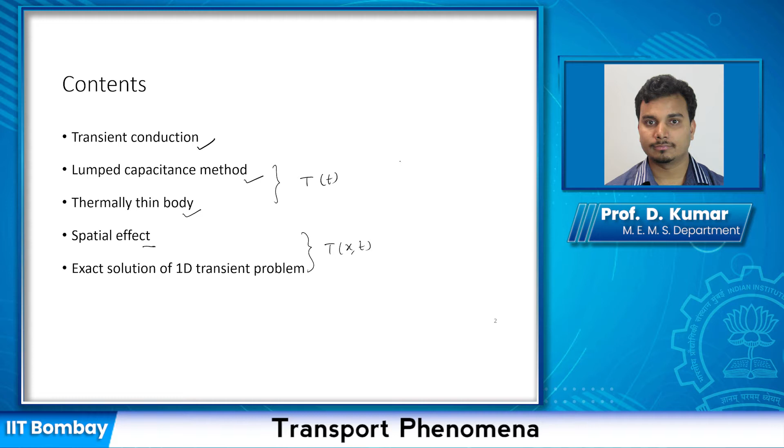So there could be two situations. In one case, we'll see where you don't have any temperature gradient within the wall. It may be initially at some temperature Ti, and then you submerge it into some fluid that is at some temperature T infinity, and then we analyze how the temperature of this entire body will change. So we don't have any temperature gradient within the body.

In this case, we'll see that initially again you have a body which is at temperature Ti everywhere, but then we'll look about how will the temperature change with respect to time when you submerge this into a fluid which is at T infinity temperature. So we are going to discuss about these two cases, and our focus will be on analytical solutions. We are not going to look at numerical solutions.

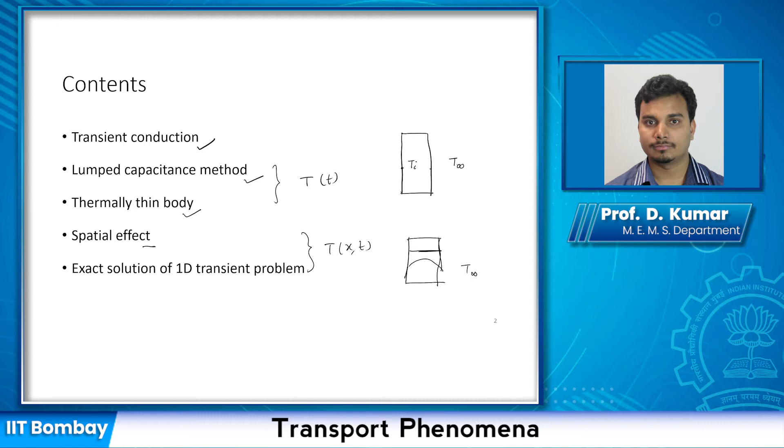So an example of what we are just talking about, the change in the temperature of the body: let us say you have a hot forging, which is initially at high temperature. It could be a steel forging, that you use for crankshaft of your automobile, or maybe large forgings. The shape does not matter a lot, because what we say is when we submerge this high temperature hot solid in a liquid, or it could be in a gas, then...

So for all time less than or equal to 0, you have T equals Ti, and just at T equals 0, you submerge it. Then the temperature of the body will change with respect to time. Intuitively you can think that initially it is at some temperature, and then it will probably change.

In this case, what we are saying is this is temperature versus time. So initially it can be at 1,000 Kelvin, and then if you keep it for a very long time, it will keep decreasing, and it will come to some T infinity. In between you will have some temperature, and you want to know what is the functional form of this temperature variation with respect to time.

We would like to know how long would it take to reach T infinity, or other things, like it can start with 1,000 Kelvin, and how long does it take to reach 800 Kelvin, 600 Kelvin, 400 Kelvin, and so on.

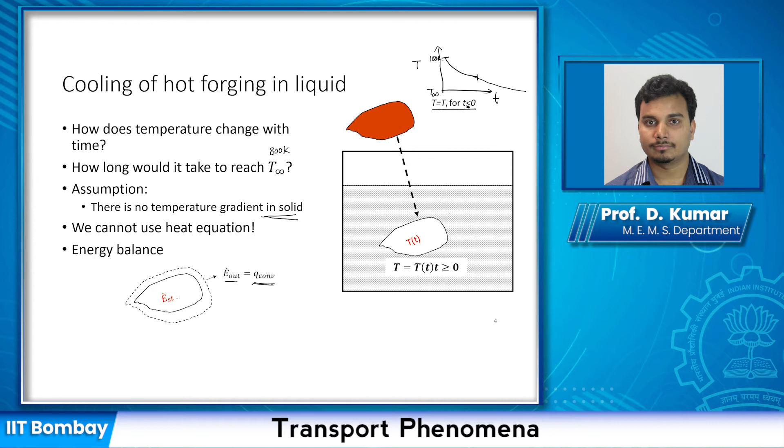So the heat transfer between this solid and this liquid is due to convection. If we do this, then the change in stored energy essentially has to be Q convection. So E in, there is no input heat in the body. It's all going out.

E in minus E out is equal to stored energy, and E out is essentially H times As times (T minus T infinity). As is the surface area of this body, T is a function of time, and T infinity is the temperature of the liquid, which we assume constant with time. It may be a large volume of liquid, so its temperature does not change appreciably.

And that should be equal to the change in stored energy with respect to time. So rho V C, where C is the heat capacity, V is your volume, rho is the density of the solid, giving rho V C dT by dt. We can write dT by dt because temperature is only a function of time, not space, so we can write it as an ordinary differential equation rather than a partial differential equation.

So once you do that, what you have done is set it up as a first order linear differential equation, which is pretty easy to solve.

To simplify it further, we substitute and define a variable called theta, which gives you the temperature at any time minus T infinity. So you can write theta i as Ti minus T infinity, where Ti is the initial temperature of the solid.

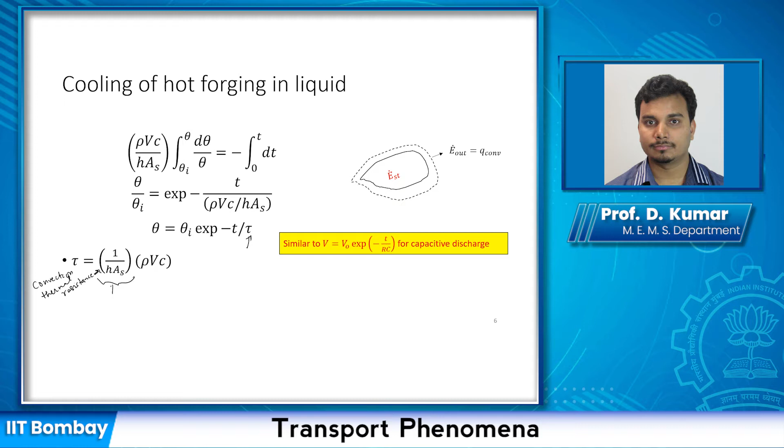So this is the convection thermal resistance, and then rho V C is essentially the capacity of that solid to keep the heat. So you can see that tau is again RC, similar to the capacitive discharge case, where RC is your time constant. This is your thermal capacitance, and this is your convection resistance.

So what we have come up with is a very simple way to analyze the transient heat conduction problem, provided we can make the assumption that the temperature does not depend on space, x. Temperature only depends on time; within the body, the temperature is uniform.

If you look at this and want to plot it, it has to be an exponential decay. At time equals 0, this thing is 1, so initially you have some theta i. As you go, at t equals infinity, this term will become 0.

So what does theta equals 0 mean? Theta is defined as the temperature of the body at any time t minus T infinity. So if this is 0, that would mean T at that time is equal to T infinity. It will take a very long time to reach exactly T infinity.

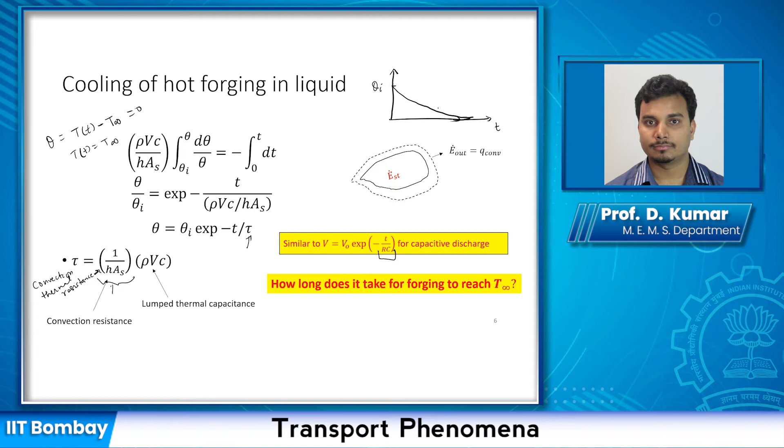But as you know, this is exponential decay, so the decay is actually quite fast initially. You can also see that it has dependence on RC, so as your time constant increases, your cooling rate will become slower and slower.

So just from this you can know. If you increase, for example, heat transfer coefficient, then you are increasing this thing, so your time constant decreases, so your cooling is faster. This is as expected, right?

Similarly, if your body's density, heat capacity, etc. are higher, then it can retain heat for longer. So your capacity is increased. So this thing will move here, so it will be difficult to cool.

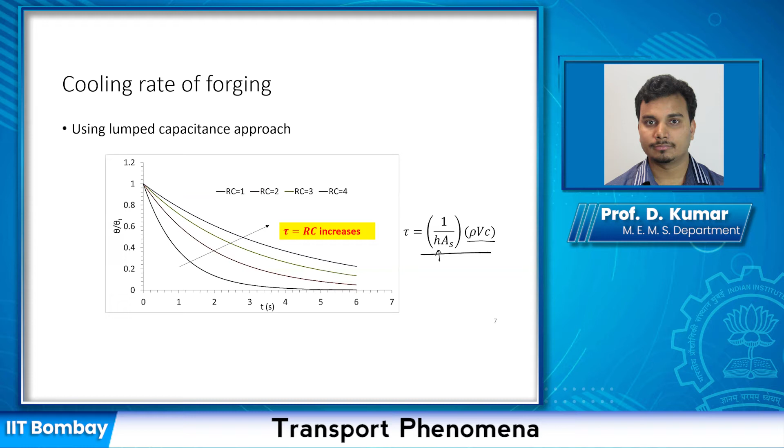Okay, so the other thing we want to know under these conditions is how much heat has transferred, because typically in such a cooling system you have a tank that you are forging and then quenching it. You will have some inlet here and some outlet here, so that you maintain water temperature at T infinity, right? If you keep cooling a lot of hot objects in this, the temperature will rise. So you want to know what should be your circulation rate. You want to know typically Q, that will give you an idea of what should be your circulation rate, that you can get just from Q.

Okay. That Q is equal to at any time hAs your theta. But you may also want to know how much cooling has happened, so how much heat is being extracted. That also you should know.

So to know that, what you can do is essentially heat transfer rate times dt integration will give you the total energy that is being transferred. So this is equal to HAS theta dt, and theta we know from there, this is HAS, you can leave here. This will be theta I, from here we know. Theta I exponential minus t by tau, where tau is again constant for a given system.

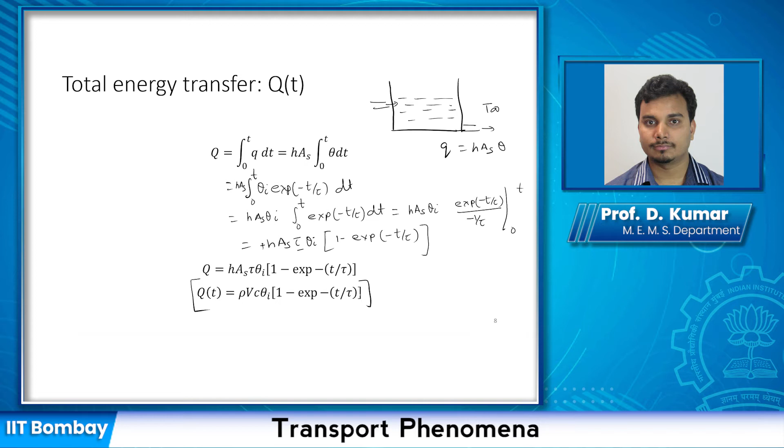Okay, so this gives you the change in total energy that is being transferred with respect to time. This is what we call the lumped capacitance method. And in summary, we have these things: theta equals theta I exponential minus t by tau, then you have the energy that is being transferred, which you can calculate from there.

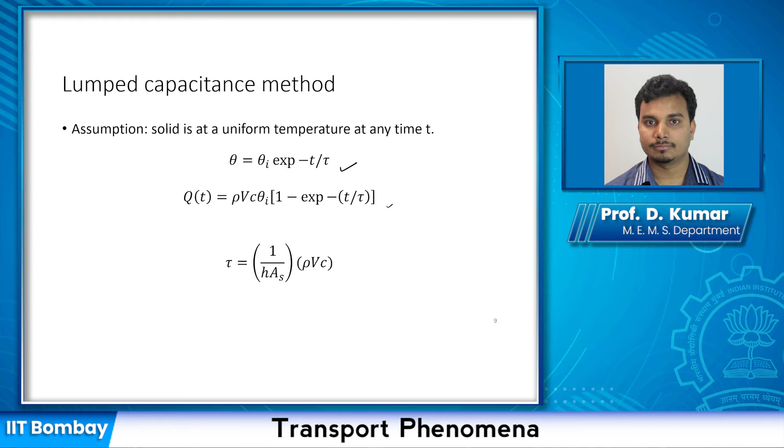Now we need to see that we have done the analysis, but we don't know when it will be valid. So we need to see when it will be valid. To do that, let us start with looking at the validity of the lumped capacitance method. We'll start with steady state conduction, and discuss later how it's related to transient.

Through a plane wall where you have fixed temperature Ts1 and Ts2, and here you have some convection. So you have conduction heat rate here, and you have convection. So at the wall, if you do what you call surface energy balance, then you will have Ka by L, Ts1 minus Ts2 — negative sign is incorporated here — equal to Ha, Ts2 minus T infinity.

So this is conduction, this is convection, and if you rearrange it, you can write Ts1 minus Ts2 divided by Ts2 minus T infinity is equal to this by this. So you can write 1 by Ha in the denominator, and then L by Ka will just go in the numerator. So what you see is this is your conduction resistance, and this is your convection resistance.

So the temperature gradient — the physical significance of this term is that the numerator actually shows what is your temperature gradient within the body, in comparison to what is your temperature difference at the surface to the ambient atmosphere.

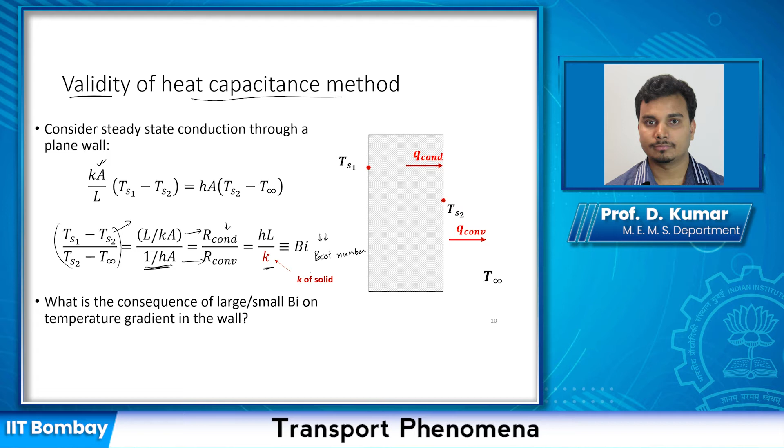So this is what we are saying, that if your Biot number is smaller, as you can see here in the temperature profile with respect to Biot number, if Biot number is much less than 1, then the temperature gradient within the body is much smaller. This is your plane wall, and on both sides you have some T infinity. So convection is happening on both sides. Initially you are everywhere at temperature Ti, but with respect to time, when you quench it, or bring it to this atmosphere, it will start cooling off.

This is the direction in which time increases. As you increase the time, it will cool off. So the temperature will reduce from Ti to this temperature, to this, and this. But if your Biot number is much less than 1, then it will decrease in a fashion where your internal temperature gradient is very small. If Biot is equal to 1 and Biot is greater than 1, then you will see that the internal gradient is much larger. In this case, the gradient may be almost similar, internal and external, but here your internal gradient is much larger because your Biot number is greater than 1.

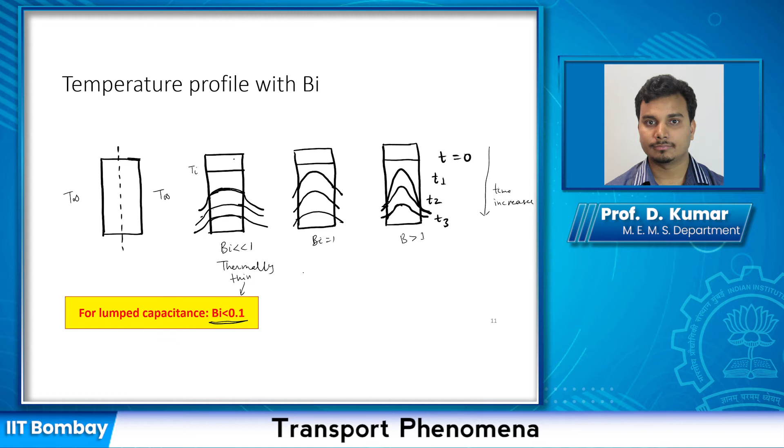So if this is the case, then we call this thermally thin, because there is no temperature gradient within the body. So we can call it thermally thin. And for this part, your lumped capacitance method is valid, and we take this number as Biot less than 0.1.

So to define the Biot number, we saw that Biot is HL by K. There could be cases where your L, your geometry may not be regular - it could be a cylinder, a sphere, or some non-regular geometry. So for that, what we define is called characteristic length, defined as volume of the object by surface area. Physically this is meaningful because surface area is responsible for convection, and volume is responsible for how much heat it can conduct and store. So V by As is your characteristic length.

For a plane wall, you can see this. You can do the analysis to show that actually the Lc will be equal to L, not 2L. So if your plane wall is of thickness 2L, if you do this V by As, you will see that your Lc is equal to L, not 2L. Physically it makes sense, because the temperature distribution within the wall is actually symmetrical about this axis, since conditions on both sides are the same.

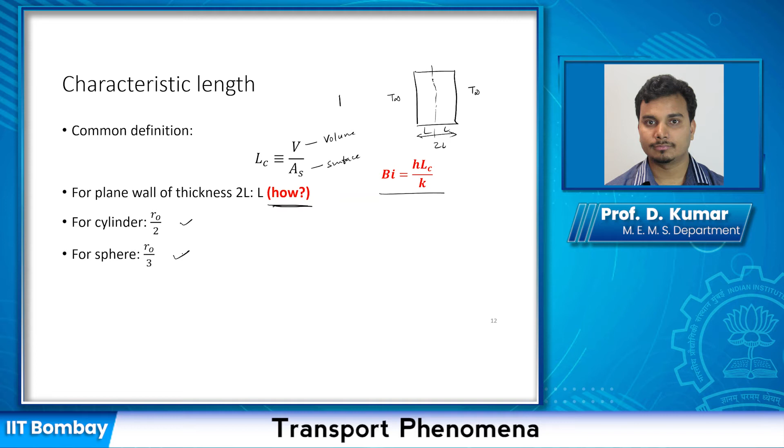So for cylinder, if you do the calculation, you will see R0 by 2, and for spheres it's R0 by 3. Let's skip that, then we'll further analyze this aspect.

So now we know what the Biot number is. If you try to get the Biot number out from this and see what is left over - HL by C, HLc by K, this is your Biot number. Then what you have left, you have to multiply by K here. T is already there, rho C is already there, but you have one Lc here, and you have multiplied one Lc in the numerator, so you have to multiply again - that is Lc squared. So you have Biot times alpha T by Lc squared. This is now a new dimensionless number, which we call the Fourier number.

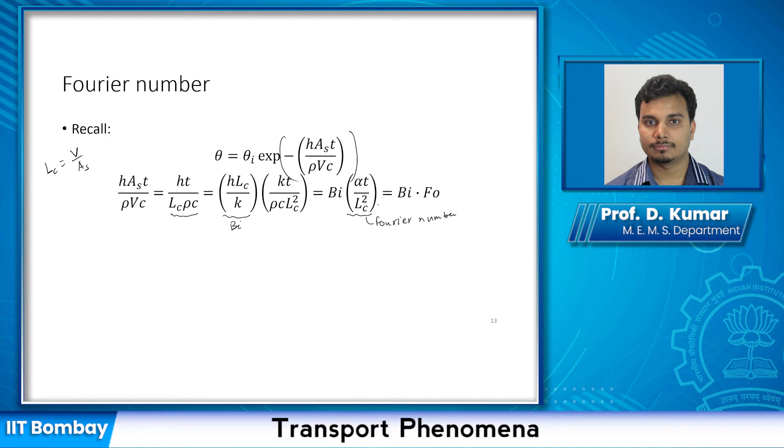Fourier number is essentially dimensionless time. K by rho C is your alpha, we have seen it before. Alpha is K by rho C, where K is thermal conductivity, rho is density, and C is heat capacity of solids. This is your thermal diffusivity, which is a measure of how fast heat can diffuse in a solid.

Based on this analysis, we can write theta equals theta I, that is exponential minus Biot number times Fourier number.

In general, for the calculation, what you need to do is first start any such problems by calculating the Biot number, where Biot number is H, LC, where LC is characteristic length, divided by K, where K is thermal conductivity of your solid. You first calculate it. If you see that the Biot number is less than 0.1, then you can use the lumped capacitance method, which means you can use this equation.

Now to use this equation, you first see what you need to calculate. Do you need to calculate the time required, or do you need temperature at a certain time? Same thing. If someone asks you that initial temperature is 1000 Kelvin, how long will it take to reach 700 Kelvin, you can calculate it. Or what will be the temperature after 2 hours, you can calculate it. So you see what you need to calculate.

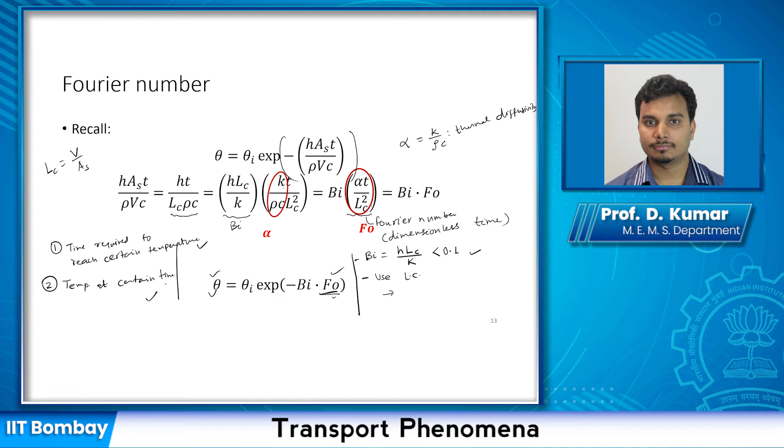Okay, so you can spend a few minutes solving these two problems. After doing this question, let us...

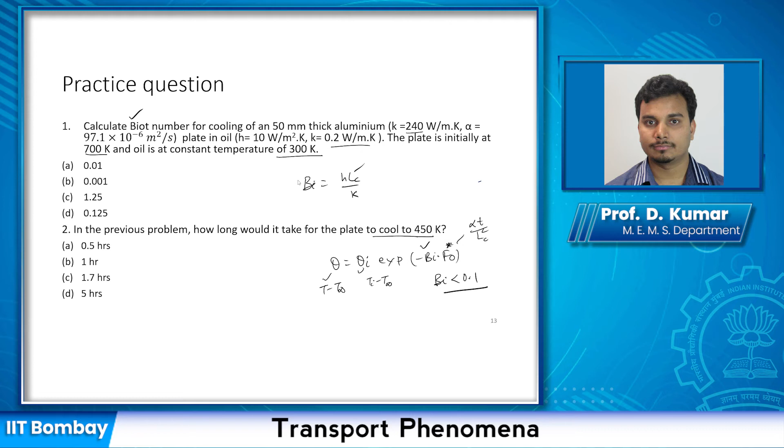Now we'll look at the spatial aspect. So far we had only looked at the temporal aspect of transient conduction. Temporal aspect is what makes it transient, right? We looked at an arbitrary shape so far, but from here we'll look at the spatial aspect.

The general heat diffusion equation is in 3D. This should be your y squared, and this would be your z squared. So it should be del 2T by del x squared plus del 2T by del y squared plus del 2T by del z squared, in 3D, plus the transient part. If you want to include the spatial effect, you need to solve this differential equation, which will give you T as a function of x, y, z in space and then time.

But the analytical solution of such 3D equations is not possible. So let us look at only the 1D problem, and we'll see how to solve this equation and come up with an analytical solution that we can use to determine T as a function of x and time, right? So spatial and temporal.

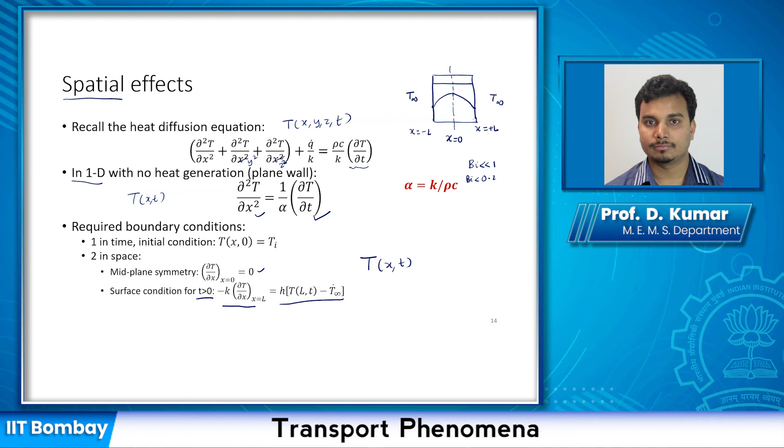So theoretically we should now be able to solve it and find our temperature distribution with respect to x and time. If you take all the variables that temperature depends on from this slide, it's x, alpha, time, L, T infinity, Ti, and H. So temperature will depend on all of these variables.

So what we'll do is start by non-dimensionalizing the equation. Non-dimensionalization has many benefits. First, our idea is essentially that it's a partial differential equation, and T has so many linked variables here, so we would try to non-dimensionalize and reduce the number of variables.

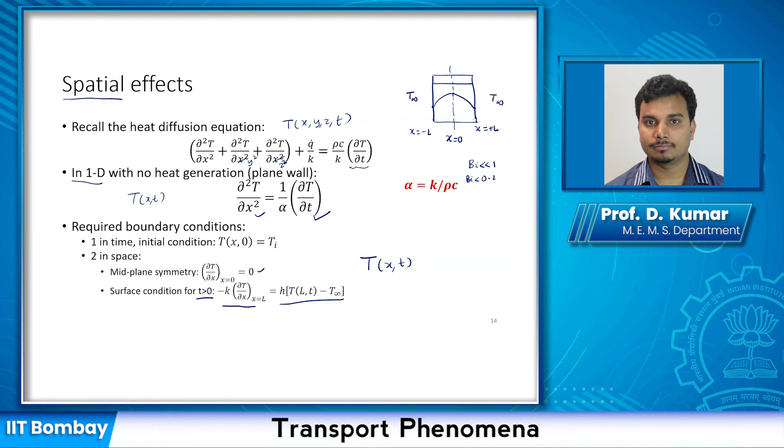We define theta star as theta by theta I. We already saw theta is T minus T infinity, so theta I is Ti minus T infinity. This is dimensionless temperature. The maximum temperature difference is Ti minus T infinity. At time equals 0, theta star equals 1, and when completely cooled off, T equals T infinity, so theta star is 0. So theta star is between 0 and 1.

Dimensionless spatial coordinate: we define x star equal to x by L. L here is not full thickness, it's half thickness of the plate. We defined x equals 0 at midplane, from minus L to plus L, so L is half thickness.

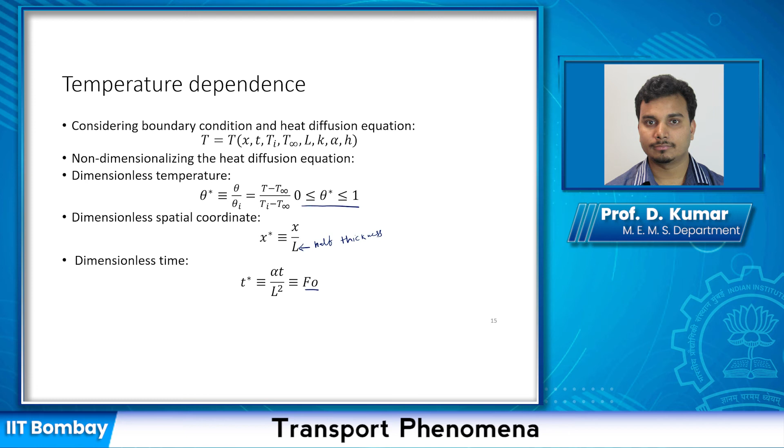Then we define dimensionless time, which we've already done. The Fourier number is our dimensionless time, which is alpha T by L square. Again, L for this geometry is just the half thickness. If it's a different geometry but still analyzed in 1D heat transfer, you can take it as characteristic length. Now we'll non-dimensionalize our equation.

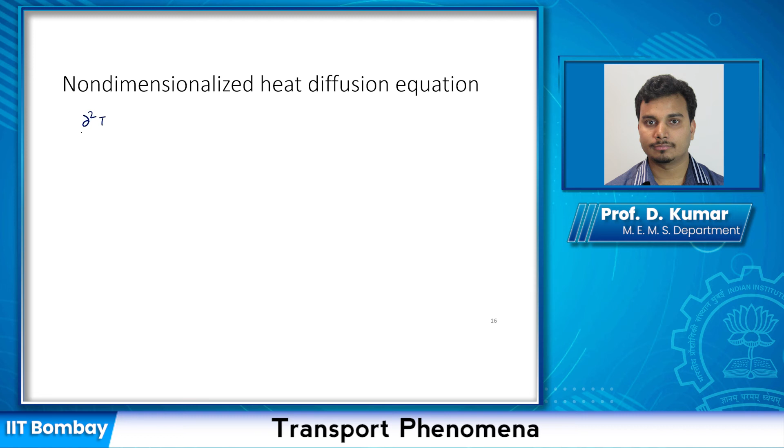To start with, you have this equation here, del 2T by del x square, equals 1 by alpha.

Now we know theta star, so we'll just use the definitions here, these three things. I'll rewrite it: theta star is equal to T minus T infinity by Ti minus T infinity, x star is equal to x by L, and t star is equal to Fourier number, which is equal to alpha t by L square.

Let's start from the right side and substitute. So del T by del t: if you differentiate this, you get Ti minus T infinity, this term comes here, and then you differentiate both sides. So del theta star will be equal to del T, so this will be just this. Similarly, del t, if you find from here, it should be L squared t star by alpha. So we can move this alpha from here.

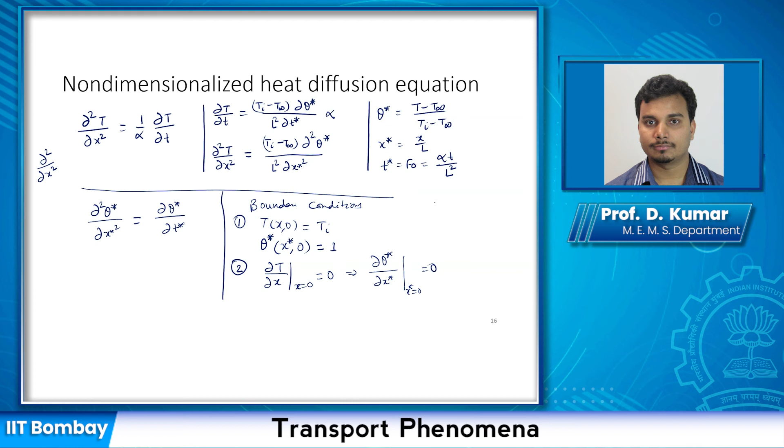Now the third boundary condition: at the surface, conduction equals convection, so minus k del T by del x at x equals L is equal to h T at L, at any time T. L means you are talking about the surface, or even minus L will have the similar thing.

Okay, so for this part, again this thing we know, minus k, this would be ti minus t infinity. From here we know that this thing will go here, and then we'll do the differentiation. So this will be ti minus t infinity, dou theta, and this will be L. So you'll have L here, so by dou x star, and x equals L essentially means x star is equal to 1. This side will remain as it is.

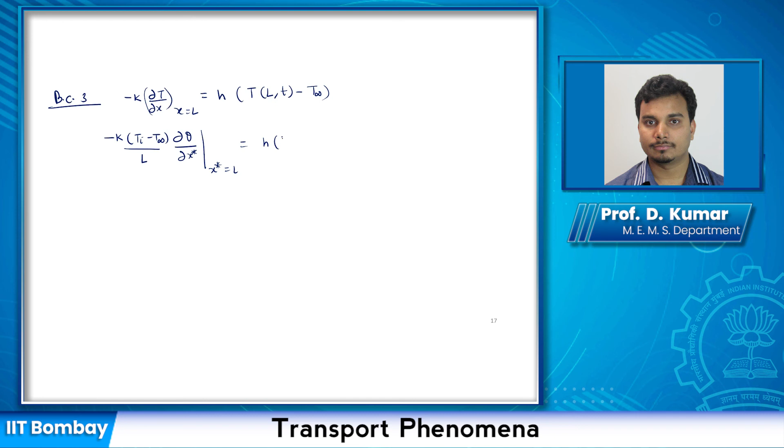So now let's do it in the next line. This minus t infinity, okay. So now what we can write is del theta, actually this will be theta star, del theta star by del x star at x star equals L.

This looks like your theta star, so this is your Biot number. So minus Biot number, then you have theta star, and for x equals L, that would mean x star equals 1, and at any time t, that would mean at time equals t star. So this becomes your boundary condition. This is equal to this.

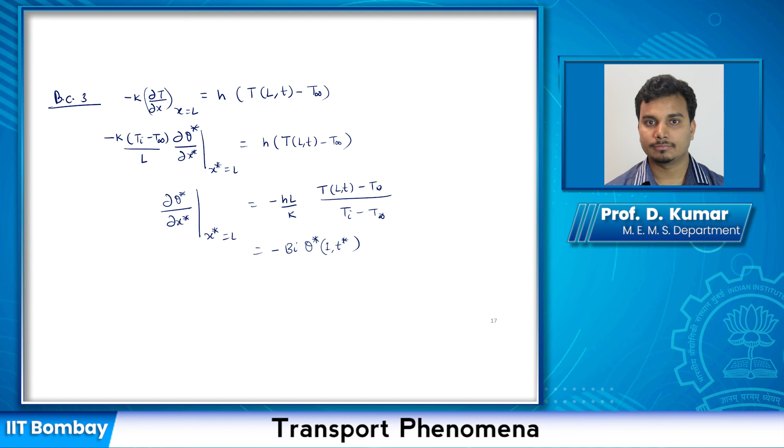So with all these things, it should be possible to solve this differential equation, and the solution comes, what we do is essentially - I'm not going to go into detail of the solution, but the solution is in the form of an infinite series of product of two functions, g(t) and f(x), and there is a way to solve it.

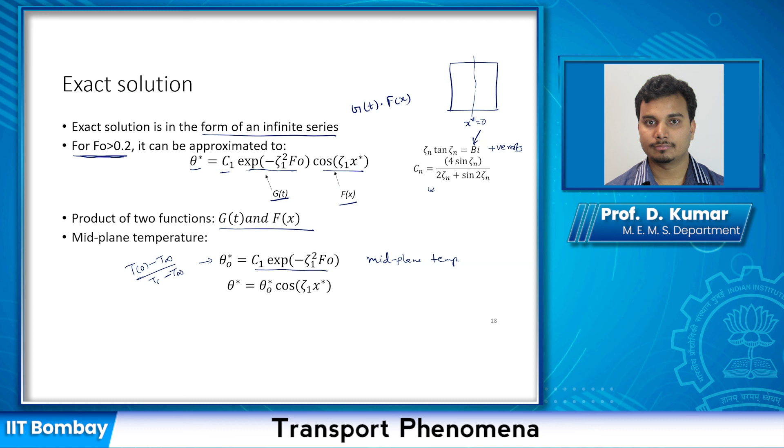So anyway, dimensionless mid-plane temperature, if you know it, is essentially the same as this term here. So you can write theta star as a function of mid-plane temperature, and then at any location, if you know it, you can calculate the temperature.

So for fixed time, you can see that the temperature profile in the body will be cosine.

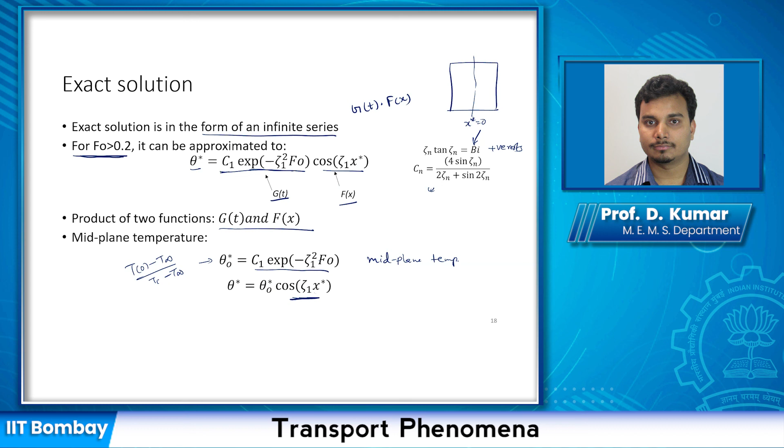Once we have this solution, you can look at other applications. For example, we used mid-plane symmetry as one of our boundary conditions. Since the mid-plane is symmetric, the half solution should apply for insulation - if you solve it from 0 to L, this is equivalent to having this as an insulating surface.

So you can solve for a surface that goes from 0 to L, with insulation here. If this is insulation, then also you can use the same equation. We have seen this before.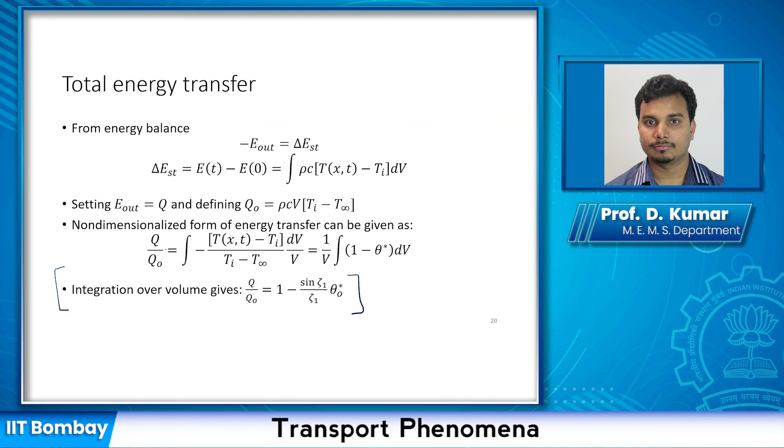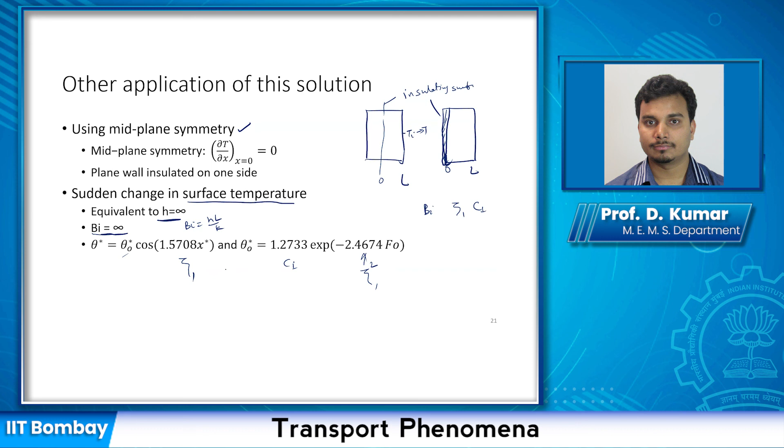So for Biot number infinity, we already know this term - from the table you can find it. This gives you zeta squared. This will be your zeta squared, and this is your cos zeta x - this is zeta 1 squared, and this is zeta 1. So for Biot number, that's how these values are tabulated: it gives you Biot number, zeta 1, C1, and so on. So for those conditions, you can calculate what the temperature profile should be.

So with that, let's do a simple problem based on the concept we just discussed.